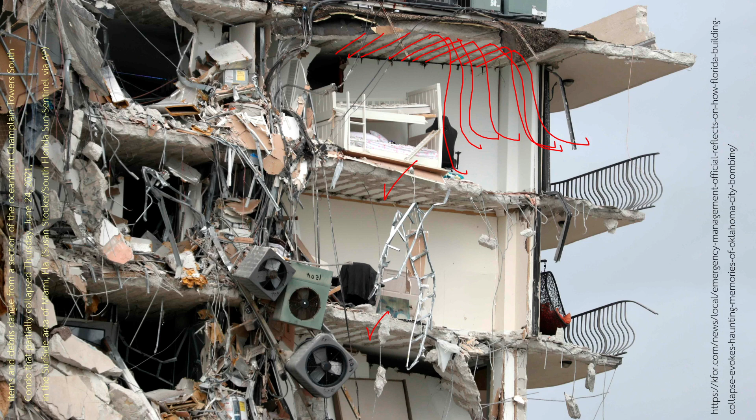Another view, you can see this very clearly. The reinforcement just gets ripped off everywhere. Same for other floors. What else to see? The same thing happens, like this one here. The thickness is 9 inches. You just hit the calculator. What is 9 inches? This is from AP. Okay, we've got to talk about the proper citation.

What else? Let me see if I have anything else for you. They do not have a ceiling. They just use the bottom of the slab as a ceiling, and there is nothing to cover the bottom of the slab.

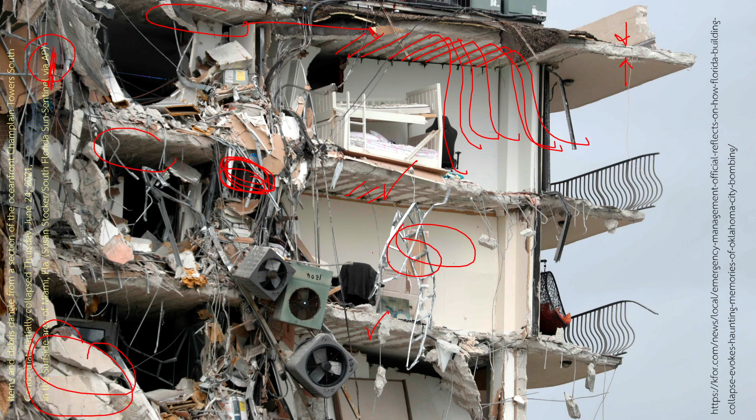Anything else? This must be from the wall, partitioning wall. And yeah, these are the slabs from the other floor. Partitioning wall, the aluminum framing. Yeah, no more. So we can continue. Another view. Yeah, nothing new. Another view.

Piping. These must be like the electricity piping conduit. AC is coming down. This shaft could be the shaft. Yeah, the AHU must be coming out, or the ventilation something coming out. Yeah, that air duct. Well, a little more. The wall panel. This is just the light wall with maybe stucco coating on the outside, hollow in the inside.

Here, well, nice to see. The steel still holds up. The slab and concrete and steel together. No post-tensioning strand. Here, you can see the rebar gets ripped off from the bottom of the slab, but this cannot come out. Probably the development length is enough, or the detailing of this zone compared to another zone also could be a little different. So it still stays there. Rebar.

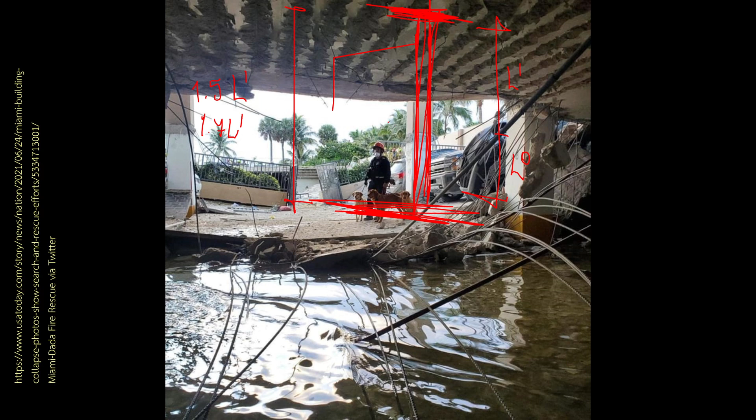When we talk about the capacity of the column against buckling, you have the stability problem now because you do not have the constraint, the restraining effects from the slab.

If you know something about buckling, and you have E as the elastic modulus, I as the cross-sectional second moment of area, you have the buckling load equals pi squared EI over L squared. But now EI is still maintained the same, you have the same cross-section. You cannot change the constant pi, but you will change the L squared to be 1.5 to 1.7 L squared.

What does this mean? 1.5 L squared equals 2.25 L squared, right? 1.5 L squared up is 2.25. This is the denominator, so if you used to have the capacity equal to P, right now you will have P divided by 2.25. If you have 1.7, what do you have? 1.7 squared, what is it? Something like 3, right, because square root of 3 is 1.7. So P over 3.

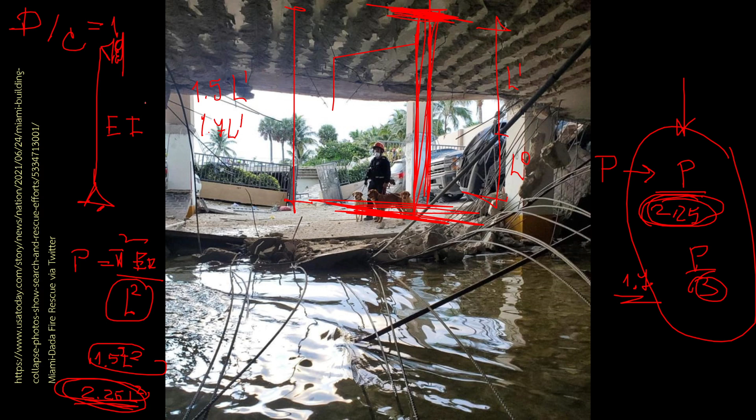Okay, so I'll clear this and come to the next slide. This is the floor plan. Let me find the mouse, it's not so clear. Okay, here's the floor plan, I need to make something like the arrow option visible.

This is where the video was taken, and see the water leakage from the pipe, which is around here between the L and M grid line. This is the entrance to the parking.

Big foundation here, and that explains why just this part of the building came down, not the entire part to the left side, right? This is the pool, this is where we just saw the dog and the fire rescue person over here.

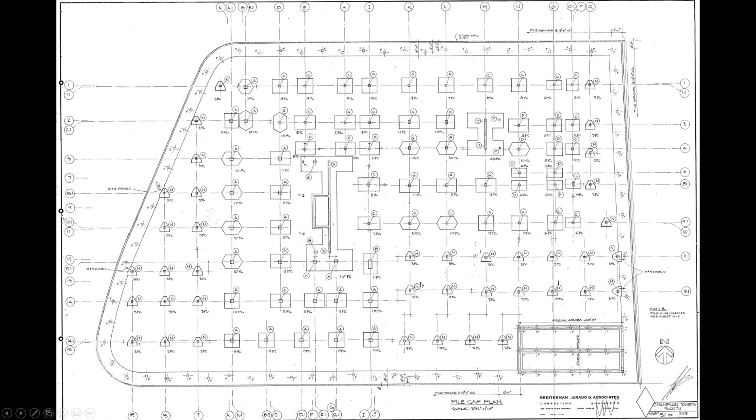This is the garage parking floor plan, and this is what we spot at 1:18 to 1:20 a.m., June 24th. Water leaks out here, debris coming down around here. So the trigger that triggers the first collapse could be around this area, or even this area, because the video shot from here, we're not sure exactly where, if it's here or here, but around this grid line.

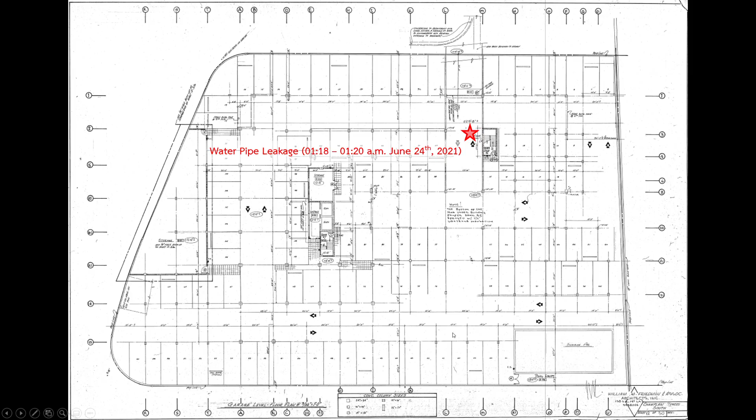The collapse might have been around this zone first, so it fell down. It could be triggered by the area even below this grid line, but then it propagates to here.

Actually, I want to talk to that guy that ran out of the building, because what he saw is going to explain a lot about where exactly the first collapse was, because when he ran out, he must have seen some area that was already collapsed. He ran out of this unit, which is just right next to where the video footage was taken, and we saw the water leakage coming out of this strip.

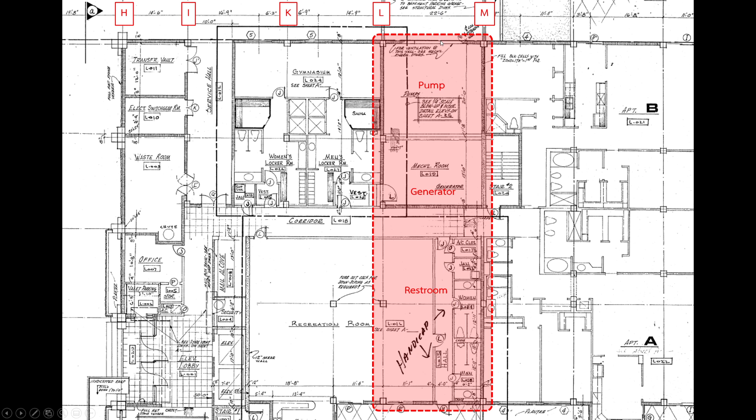The post-tensioning slab for a span like 8 to 10 meters is somewhere around 25 to 30 centimeters, and that is the post-tensioning one. This one is not the active reinforcement.

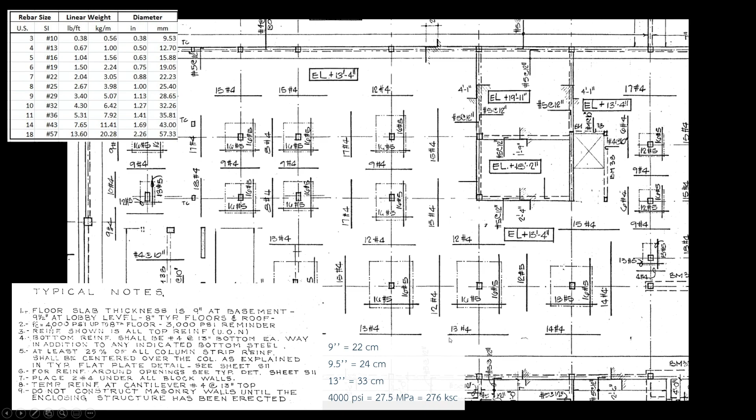Well, if anybody wants the building's structural reinforcement, structural layout, and structural drawings, you can ask for one from me. But here's the thing -- here's what I saw and later found in the structural drawing.

You can see here, the bottom reinforcement is overlapped over a 6 inch length. 6 inches is about 15 centimeters. The rebar is, well, I don't remember, number 4. Number 4 is 12 millimeters.

So if you have the lap splice and expect it to transfer the full load to the yielding of the rebar, you will need probably 50 times the diameter as a rule of thumb, which is 60 centimeters. What you have here is 15 centimeters, which is just a quarter of what is required to fully transfer the load.

And that explains why, even though they have the bottom reinforcement, it never worked as the progressive collapse prevention reinforcement. They have it, but it's just not good enough. So when the punching shear occurred, yes, the top reinforcement is going to carry the negative moment, but there was no punching shear reinforcement at that time. There's no such thing.

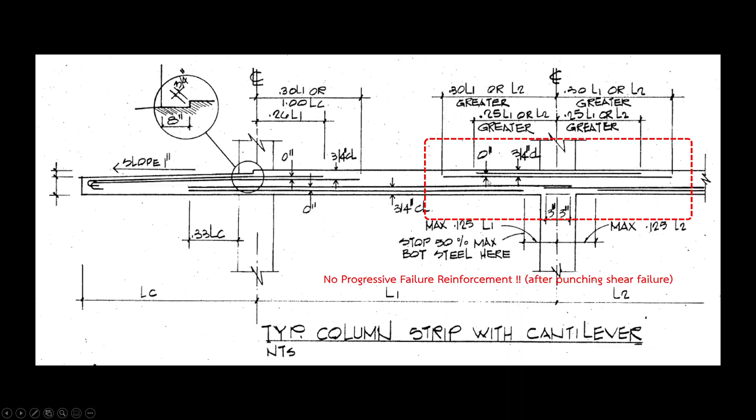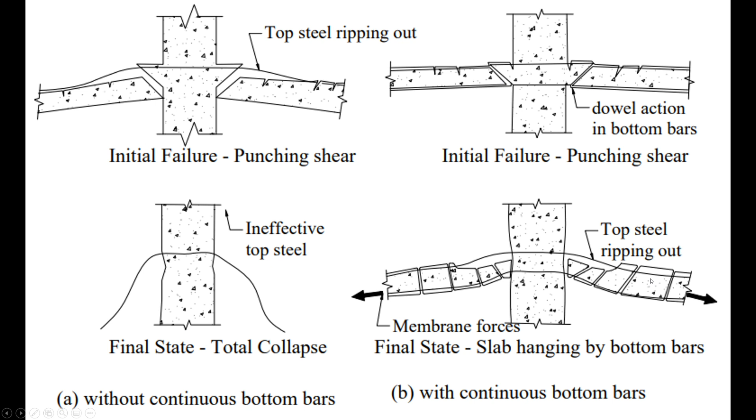But if you leave the bottom rebars in there, when it fails by punching shear, the top rebar will get ripped off. You can see when the slabs settle down, the top rebar just gets ripped up this way. So we cannot rely on the top rebar. It's no longer useful after the punching shear, but the bottom one cannot be ripped off because it is hanging the concrete. So you can have the cracking, you can have the breaking, but you do not have the collapse.

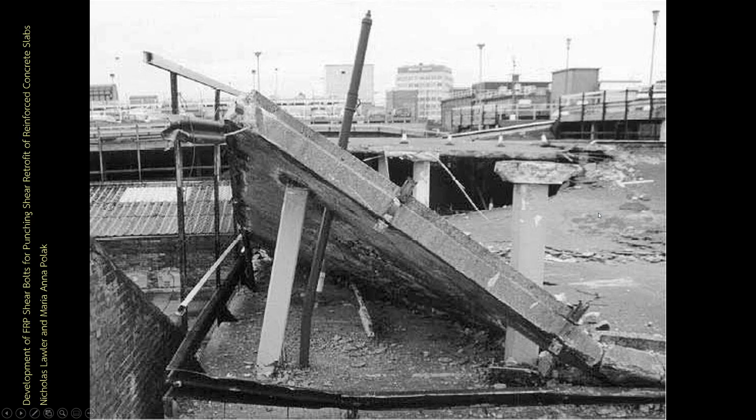This picture here is taken from ASCE, so it shows evidence of punching shear failure in a real structure. But not too bad, this structure just had a localized failure over one story. It's not bringing down the entire building.

This will probably be the last slide or last video. I didn't expect that my presentation would be 1.5 hours. I thought 15 minutes and I'd finish all of this up, but it's 1.5 hours. So okay, let me wrap this up with this video.